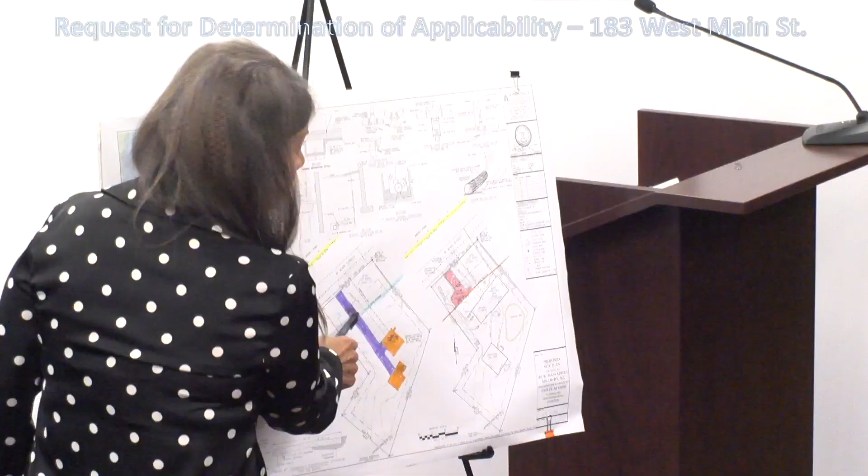So if you can all see, this here is the existing condition. This is a single-family home, this is the existing garage, they're both going to be demolished. There's also this driveway, it's currently gravel, and the wetlands is across the street. I kind of drew the 100-foot buffer zone. So as you see, the only thing that's going to be in the 100-foot buffer zone is only a small section from the existing driveway.

So this is going to be the proposed plan. Right now the house is on a septic, but it's in the back, it's going to be connected to sewer. The driveway is going to stay in the same place, it's going to be paved, and it's going to be a lot shorter, as you see, like before it went all the way to the back. Except that it's just going to be a little bit wider here for a turnaround area. We're also going to improve the site by putting an infiltration trench on both sides of the driveway.

And the house is going to be here outside of the buffer, the ADU unit all the way back outside of the buffer, and the stockpile area is going to be in the back. So basically, the only thing that's going to be in the 100-foot buffer is just widening the driveway a little bit, to have a turnaround access area.

So that's going to be lawn? It's currently lawn, there are no trees here. Now, how does the person from the ADU, if they have a car, do they have to walk to it? Yeah, the driveway is going to end right here, and they can walk.

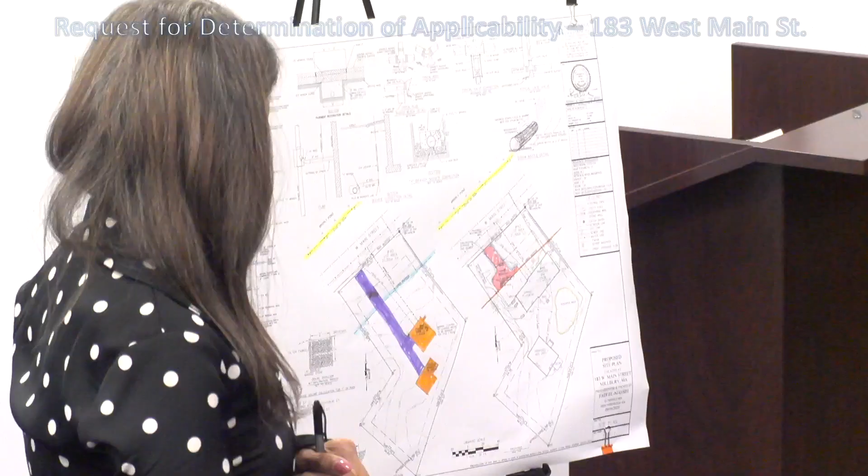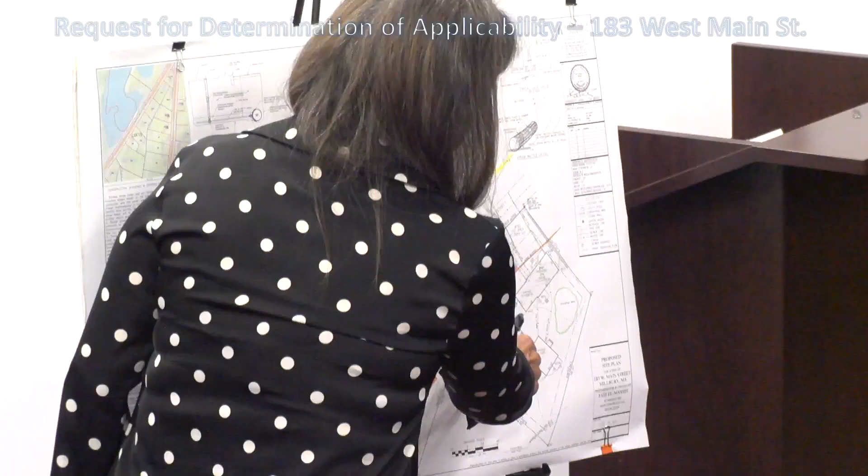Is there any intent to put a sidewalk or maintain the gravel to the back, or is it just going to be a walk across the grass? What impact might that have on the condition of the terrain there? It's not really going to change much, but they can put maybe cobblestones for a walkway. Are they going to do a little bit of a walkway? Probably, a little bit. So if they do a little bit of cobblestone for a driveway, it is outside the 100-foot buffer.

I know it's none of our business really, but describe what an ADU is, because we're going to see a lot of them. Yes, it's an accessory dwelling unit, and basically it's going to be an attached unit. Unattached, right? Unattached, yeah, sorry. It's detached. Okay, yeah, that's another word for it.

So it's basically a small unit that's going to be 900 square feet. It's going to be like a bedroom, a kitchen, a dining room, and a living room, probably something like that. And it's going to be connected to a sewer system, the storage system? Yes, it's going to be connected to the town sewer and town water. There's currently a septic, but they're going to abandon that and connect the new house to the existing sewer and water.

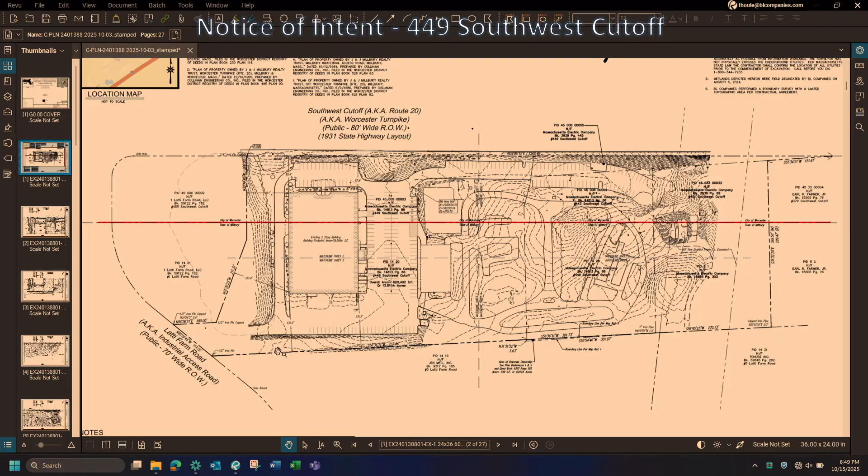So jump ahead to the site plan. The proposed project includes a fairly limited scope.

There's 3 pockets of work areas, but the overall initiative here is that National Grid is looking to add more electric vehicles to their fleet. Recognizing the environmental sensitivity, they would like to go green and add EV capabilities, and to do so, they need to add EV charging infrastructure. That's the main driver for this project.

This is a very highly populated site. There's a lot of workers that come and go out of this site, so just a straight conversion of existing parking stalls to EV does not satisfy their needs. They need to add parking because these electric vehicles will be additional vehicles into their fleet. So there's an addition of parking. That's the core driver here.

Those parking spaces are largely the work areas themselves, highlighted in that shaded gray color. We've got 48 total new parking spaces, 20 of which will be EV capable. Those EV stalls are in this cluster on the western side over here.

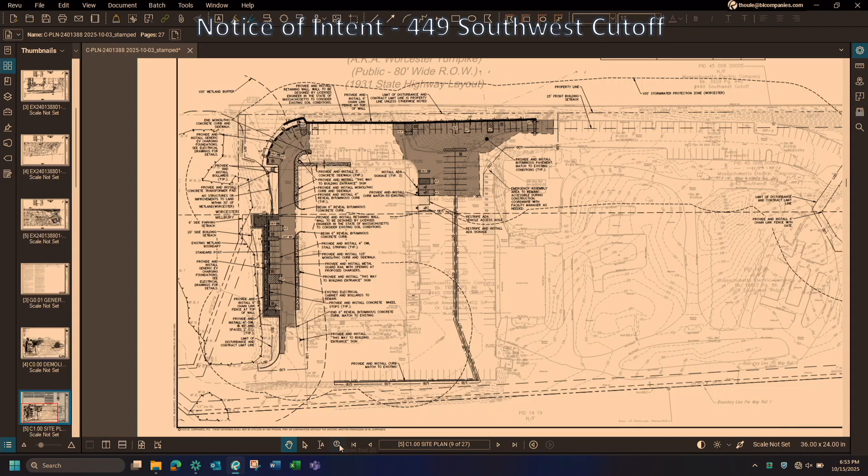I can zoom in closer over here so we can get a closer look. This is the section specifically within Millbury. The line here with the triangles on it is the flagged wetland boundary by BL staff. We do get fairly close, but we are staying several feet away from the edge of the wetland resource area to provide this expanded parking lot.

There is a drop-off of roughly 6 to 8 feet in elevation from the current paved area down to the wetlands, so we are proposing to install a retaining wall. That retaining wall is holding up the parking lot, so it can be constructed from the uphill side. There's very little expected impact on the downhill side, and certainly none proposed within the wetland resource area itself.

So we do have the proposed retaining wall ringing this area. There is a section of gravel between the top of the retaining wall and the edge of the paved area. That is where the EV equipment will be located between the chargers, and then there is a small area for a small transformer for the EV equipment. And then certainly the parking stalls themselves are located in this more solid gray area.

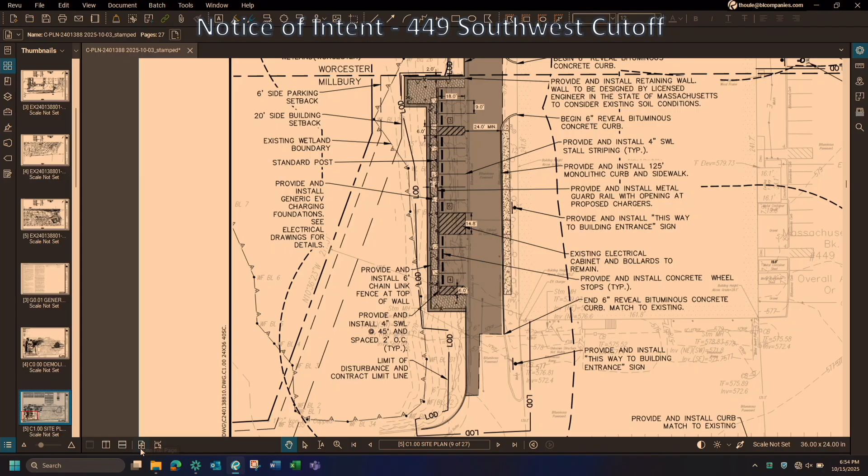So specific to stormwater, we are making a few modifications to the site as a whole, but the intention will largely remain the same. I'll jump over to our stormwater, or our drainage plan, now. In total, there is an existing stormwater management system on site. It's on the older side and doesn't necessarily meet all the requirements of the current standards.

Essentially what's happening is on the western side, we're proposing a new catch basin located at the very southern end of the expanded parking.

That will be the main collection point for this new area, as well as the existing driveway. In order to balance flows, we need to change what catch basins flow where on site so that we can reduce peak discharge rates towards the wetland, but also retain somewhat similar flow volumes so that we don't dry up the wetland or drastically reduce the amount of water going to it.

So on this western side, we are adding a new catch basin in the driveway. It's going to be piped to the north and tie into an existing drainage line that discharges into the wetland currently through an existing pipe outlet. There is no new proposed discharge points; we are reusing the existing discharge point.

There's also an existing catch basin located roughly on the corner of the building, the northwest corner here. We are proposing to swap that out for a hydrodynamic separator unit. I believe there will be a hydrodynamic separator treatment unit online as well, so that all water collected in these two catch basins is treated prior to discharge.

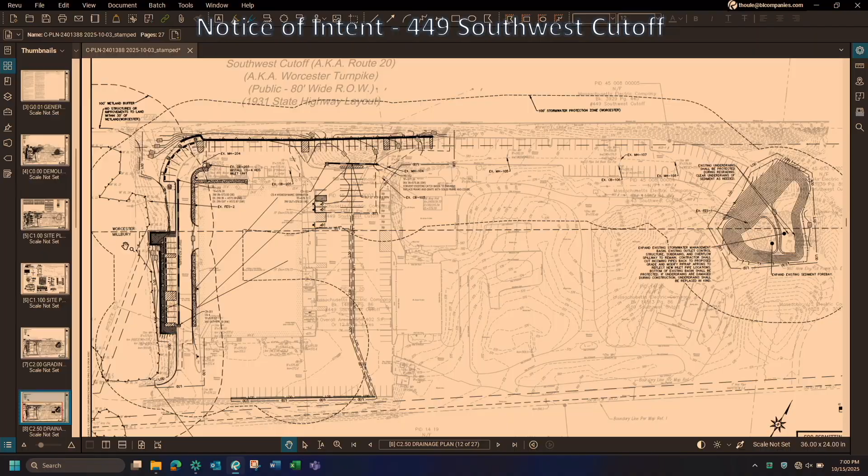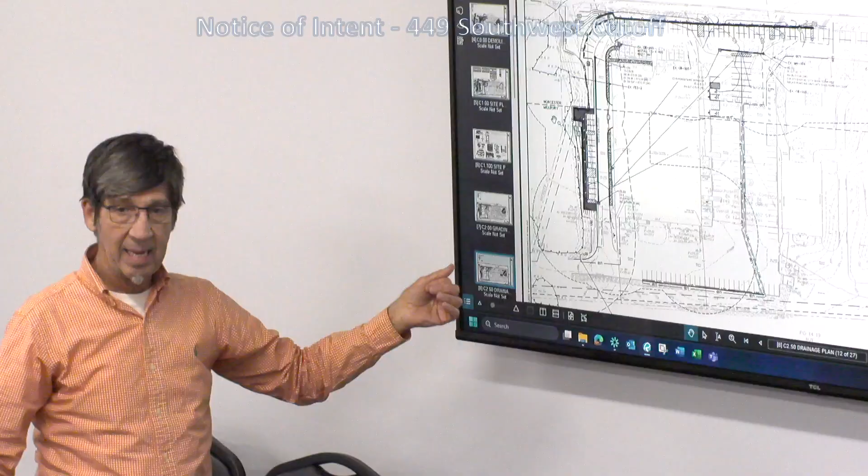I did have some concern about this wall and a footing so close to the wetland. It says bottom of wall is at an elevation where it seems to meet the grades there. I would think you'd be putting in a footing, but I know the design is separated from this plan right now. You're asking for a design from another engineering firm to do the wall, is that right? This would be a modular block wall, so it would be coming from whoever the selected manufacturer is, who would give us the stamped drawings.

It could be, say, Versa-Lok, for example. Generally for those, what they do is bury one to two courses of block. So in this case, if we're going with a standard Versa-Lok Square Foot unit, they're 8 inches high, so they might be burying 8, maybe 16 inches.

It comes down to the structural calculations, how much they need to bury. Because it's just burying 1 or 2 courses, it's not like a traditional spread footing on a cast wall. We're able to keep the trench very narrow for the footing of that wall, just enough for them to work and set the block. It could be 6 inches wider than the wall itself, but it doesn't really need to be that wide. That's why we're able to work as close as we are, because we're going with a modular block. If it were a traditional spread footing, cast in place wall, they would have that T shape of the footing, which would notably encroach into the wetlands. That's why we steered away from that.

Thank you, Mr. Chairman. Go ahead, Paul. No cement is going to be used at all, right? Not on that wall, no. It'll be all modular. There'll be concrete blocks, but it will all be precast units brought into the site. No concrete poured on site for that wall.